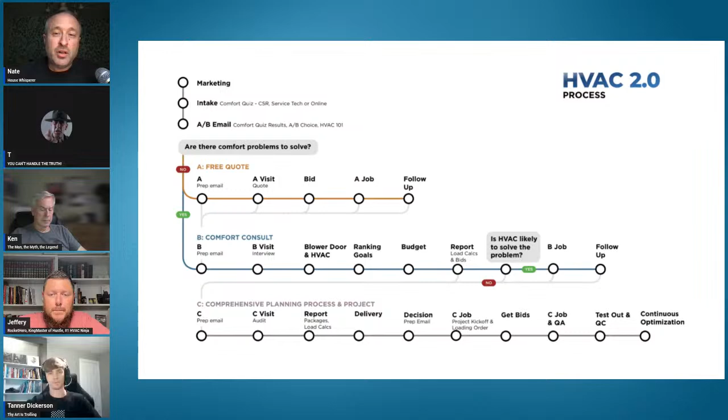And we're actually going to dive into a piece of the detailed process. So this is pretty intense. This is the entire 2.0 process. The C path down here, this is the one that's going to be used maybe 1% or 0.1% of the time. So when people come in, they find you through marketing or from a service technician, whatever that looks like. They go through the intake and they go through the comfort quiz.

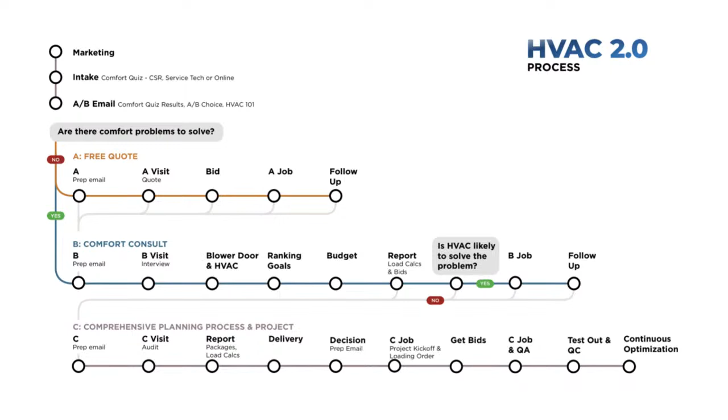Then they get the results of the comfort quiz sent to them, and they can decide, are they going to do a free quote or a comfort consult? So that's what we're going to be running through. So we're going to take a much deeper look at this for what it looks like in the software right now and how that might affect your business and make your life easier and hopefully sell you a bunch more. I'm actually going to skip this slide. We've talked about it. That's the less detailed version.

So we have talked in many of the episodes in the past about the 6 functions of HVAC. This is fundamentally how we, at least, sell better equipment very consistently. Because there's 6 different things that every HVAC system should be able to do. Every car that has air conditioning, which is basically every car since like 1992, can do 5 of these 6 functions. Most houses can't do any. And so they are load matching, dehumidification, mixing, filtration, fresh air, and humidification.

And what's nice here is with these smiley faces, which this is what you show them at the end of the quote, the basic system doesn't look so good. So yeah, you don't even have to show them SEER or efficiency. Nope. Or things that don't matter to them. Show them this instead. Yeah, no one cares. This won't confuse them. Yeah.

And like we've shot at the IRA heat pump program because it leads to systems with bad dehumidification, and then you don't get fresh air with those generally either. And so this will help lean people away from that sort of thing. And then you can put whatever systems you want in, and you can change all of these names. Like all of this is editable. But we're going to work up to how you show this sort of thing.

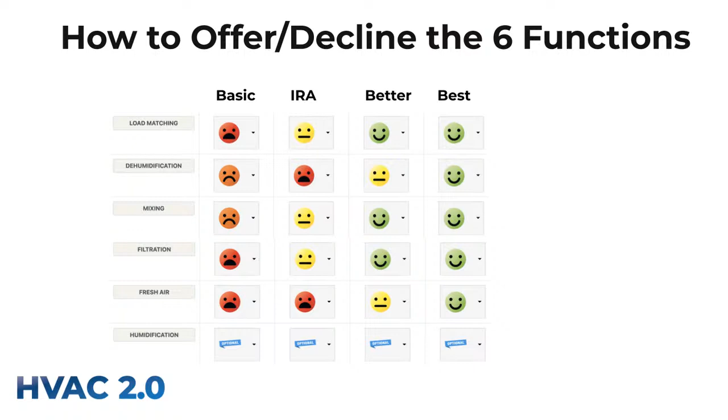And in 2 weeks, I'll walk you through all the videos that we have done for these. So it's not that they couldn't use another update, but the content is there for very quick education in 10 minutes or less for clients. So if they're about to spend $10, $20, $30,000, isn't it worth 10 minutes of your time to get some basic education so that you can make a better decision? So we'll show what those videos are here soon.

And also to kind of add on to that, the videos being the educational material, this is kind of to take what they've learned and then put it into terms where it's bite-sized chunks where they can understand what the differences are, because everybody that's done this, they've been in the situation where someone's needing a new unit and they're asking questions about, okay, well, what can I get? And then you start trying to explain the different options that you have, and then you see them go, oh, none of this makes any sense, and you realize that, oh, I'm wasting my time.

Well, the whole concept of these smiley faces and such really was just how do you take the things that are actually important, the things that they need to understand, and then use that to then differentiate the different options. So then when you're showing them options, they go, oh, I understand now why this basic unit costs $10,000 and this high-end unit costs $30,000. Yeah. Yeah, it's a value building exercise.

I mean, if you're selling on SEER, what's the difference? This one's 15, this one's 17. It'll save you $25 a year. You're not going to sell the higher SEER stuff, or not at a significant rate. But I mean, everyone here sells 80 to 90% high end. Communicating, whether that be 5-stage or fully modulating. I have sold one 2-stage ever. And that was for a Habitat for Humanity project where we just flat out didn't have the budget. So this flips how your sales work. And so if you can double your tickets with this, that's pretty cool.

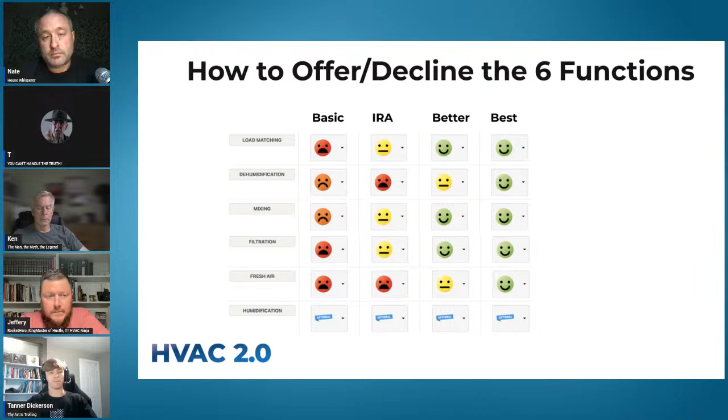Well, one of the things that we thought originally when we did the free quote is that it'd just be an easier way of doing the typical free quote that people are used to doing. And it hasn't been out for very long that these guys have been testing it, but feedback from Reedy and Ronnie is that they're making much, much bigger sales, and it's really easy to sell the better equipment using the free quote process. So that's been interesting. It's just anecdotal right now. We really want to get a year in and make sure that that's sort of what everybody experiences. But in the short term, Reedy sold a $32,000 job off a free quote 2 weeks ago.

Yeah. Or rather, the way I would say it is that it's not that they're selling better equipment; it's that people are buying better equipment. Correct. Yeah, educated. Thank you. Yeah. This is a pull process, not a push. No one should ever feel like they were pushed into something here. So you can have this, or this. Here's your prices and your ramifications. What works best for you?

And it's amazing. Tanner, it's funny. You mentioned it last week, you see all this stuff. So how do you differentiate yourself?

And come on, most people are not differentiated. It's our trucks are pink and our trucks are blue. It's these really small little things. This differentiates you, and it also differentiates the equipment in a way that your clients can understand, which is what we're trying to do. And most importantly, because we started at the far end with doing the really difficult home performance projects, this doesn't close any doors as you get there.

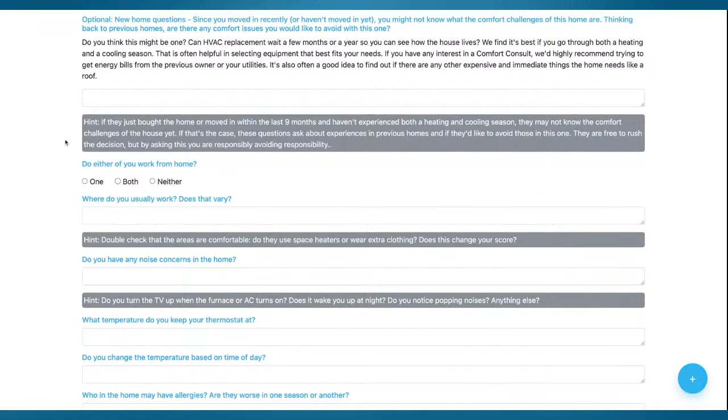Some people have just moved in, so this is an important piece too. If they have just moved in, been there for a couple of weeks or maybe a couple of months, until you've experienced both a heating season and a cooling season in a home, we really don't recommend making changes because people tend to downplay what's going to bother them and then choose the wrong system. It's better to wait if the system has life. So you ask them some questions, or if they want to move now, hey, have you had any issues with previous homes? Stuff like that. Do either of you work from home? Because this is going to be driving a lot of comfort stuff now.

And then we get into a bunch of responsibly avoiding responsibility questions. These are all pulled from the Comfort Consult questions, but this is way fewer than there are over there. So do you have any noise issues? Where do you keep the temperature at? Does anybody have allergies? Does anybody have dry skin, pest issues? Have you noticed mold or mildew? So these are hyper shortened, but if you sniff much here, this may shift it towards a Comfort Consult. Although like we talked about last week and how to price it, you price the Comfort Consult high if you don't want to do them.

Then this is kind of a fun thing. Do you know what size equipment you have? And actually, if they say yes, the odds are pretty good they've gotten quotes before. And we're going to add another question. Jeff, what was the question about? I think it was later in the pricing, right? Like, do you have any idea what this might cost? Yeah, I mean, all these questions, again, are just trying to get a little bit more information, how to help guide them and kind of figure out where they're at as a buyer. Yep. So this question, another question coming up here in a bit, just all lead to that.

And well, the one that I was thinking of in particular, if they have an idea what the stuff is going to cost already, it means they've had other bids. So that lets you know you're not the first one through the door, which is usually good, frankly.

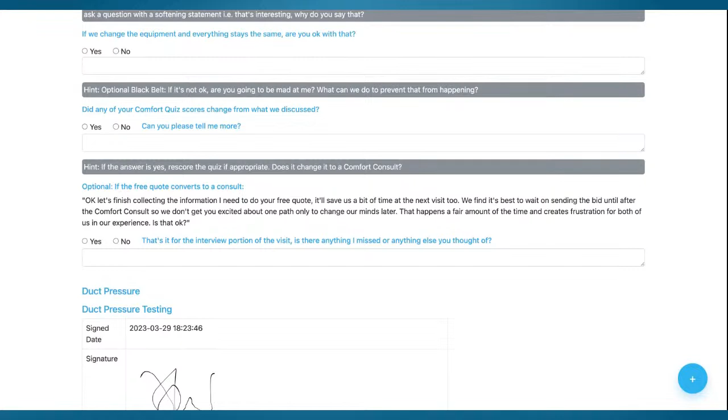And Jeff, I love your question here. Imagine you had a magic wand and could change anything in your home. What would that look or feel like? I love that. And then this is Johnny: if we change the equipment and everything stays the same, are you okay with that? And then you ask them again, did any of your comfort quiz scores change from what we discussed? So those are the questions. Those shouldn't take particularly long, but you just responsibly avoided responsibility like a badass. If they say no to all these things and they bring it up later, like, ma'am, I documented what you told me and you said it wasn't a problem. It is what it is.

Actually, Nate, that might be somewhere along the line, probably at the beginning. We want to let them know we're gathering information for both of us. I'll be giving you a copy of this so that you'll have a record of what we talked about. We don't want people thinking, oh, they're just trying to learn more about me so they can push my buttons and get the most money. That's a really good improvement that we should put in here, Ken. Yeah, because this is not meant to be coercive. It's just we want to ask all these questions.

I mean, if you go to the doctor and he doesn't ask you enough questions and there's multiple things wrong with you, it's kind of his fault if he misdiagnoses you. Yes. So we don't want that to be our fault for misdiagnosis because we didn't ask some questions. So we wanted to pull some of them over from the comfort consult, but there's 3 or 4 times as many over there. And this is a free quote. We're not getting paid. We still want to move on, but we also want to check the boxes.

Now, another order thing that's not correct here is duct pressure. There's going to be a blurb about it, or a couple of questions about it, and then the 70-second video, which is actually 90 seconds, that Ted likes to talk about, and you have them sign off whether they accept or deny that. And this is where we recommend offering duct pressure, which is external static pressure testing, for something pretty cheap, like 25 or 50 bucks, so that if they say no and they sign off on it and the system dies later, it's like, look, you were the one who didn't want to spend 25 bucks. Come on. Because this will likely lead you into a sizing thing if they have a high static, which might lead you to a comfort consult or just more conversation. But the odds of getting a job because you're doing this are much higher.

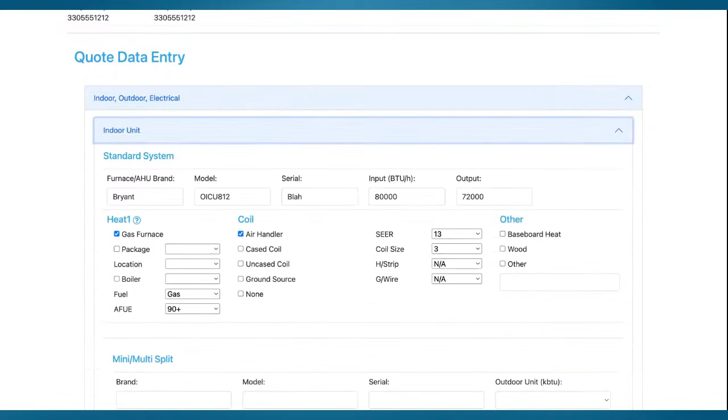So this is going to also drop to only 3 sections. So we're going to have the indoor, outdoor, and electrical section. We're going to have the static pressure worksheet and equipment measurements, and then we're going to have equipment choices. That's all that's going to be in here. So these other ones are going to disappear shortly. Well, also the indoor, outdoor, electrical, we're also going to have a mini split ductless option as well. Thank you. Yes, because that is currently in the indoor here. So this is meant to be quick and easy, but still complete data entry.

Big thanks to Ken on this, and also Jeff. But man, Ken, thank you for your help on all this. That was great.

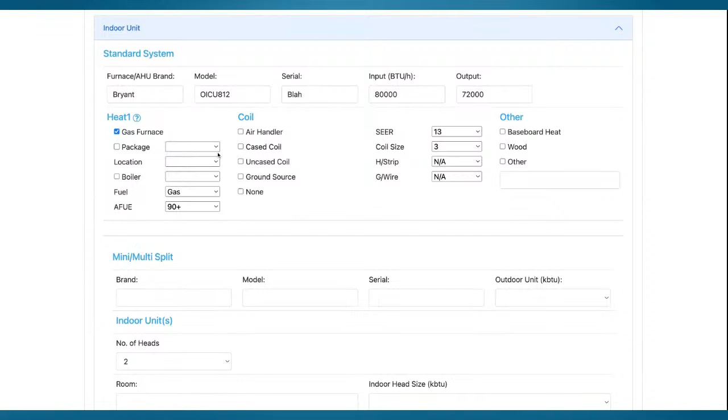And so you can put in what they have now. Brands, model number, serial number, input and output if it's a furnace. You can check whatever it is. We did have this set, so there were rules on what you could do, and then we kept breaking it. So now you can select whatever you want. So please have a brain as you check these boxes. You're not going to have more than one. Like you're going to have a gas furnace and a cased or uncased coil.

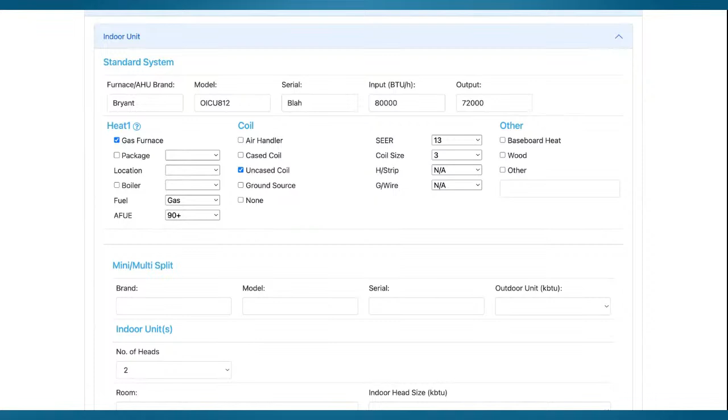Is that, no? That should also show the coil stuff. Need to figure out what's going on there. But this pulls a lot of your key stuff here. In fact, there's generally some stuff disappeared in the update since I looked at this a couple days ago. So, all right, we're going to have to go back and put those back in. There's supposed to be a bunch of stuff here also about what the venting is, what the gas line is, things like that.

Yeah. Gone. Is it down further? Yeah, no. Nope. Oh, God. Down. Yeah, there's supposed to be 3 or 4 more sections here. And then you get into the mini and multi-split, which will end up being a separate workflow.

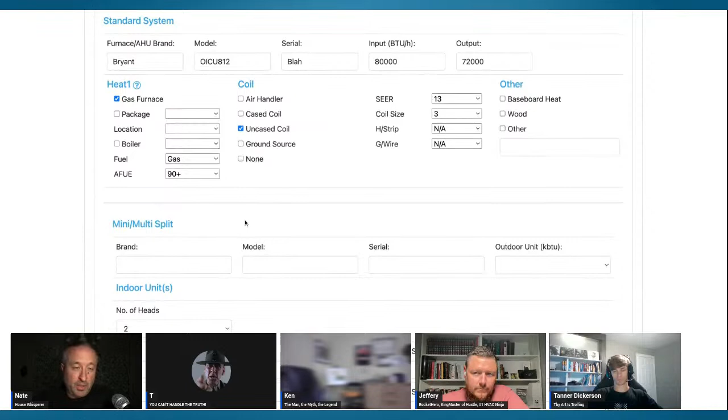3 updates go forward and 1 update goes backwards. This is when I keep saying, yeah, like 2 weeks, this is the stuff that keeps driving us nuts. Like something gets pulled out by accident and we have to catch it. So in any case, there's a bunch more stuff that should be here that's not at the moment. And it was there last week. So we'll get that back in.

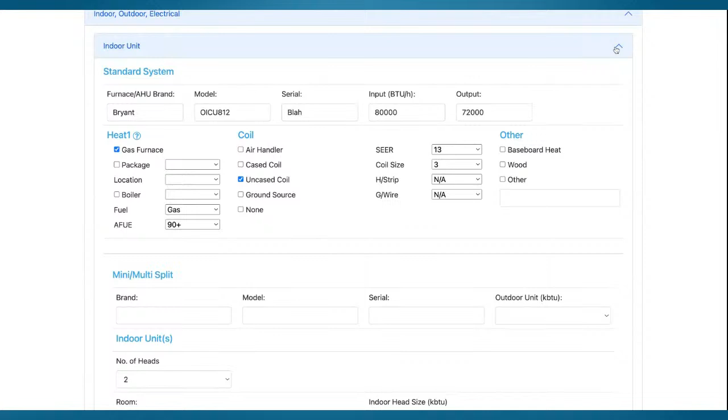And then outdoor unit is pretty simple. It's just your brand, model, size. Is it an air conditioner or a heat pump? If it happens to be a window unit for some reason that you're putting in here, you can do that. And then what's the output of the system? So that's super simple.

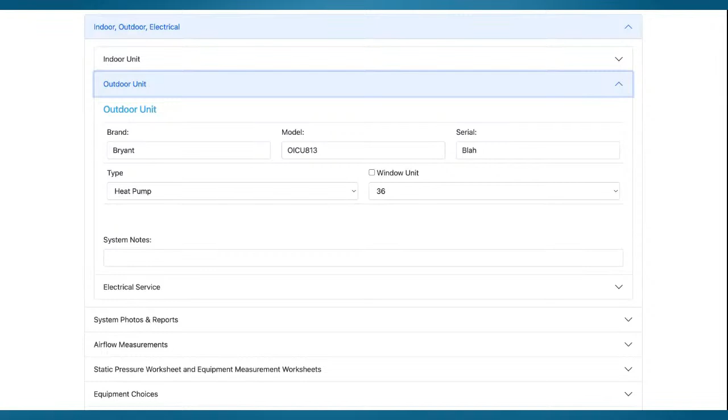And we are missing the refrigerant line measurements here too. Yeah, that's one that they said in programming that they were having some issues with in the measurement section. Okay. So we know they're working on it. Yep. So hopefully Saturday, all this stuff will be back along with the other little tweaks that we were working on.

And electrical service, I'm happy to have this for either the electrification side or just in general. I think these were questions I always got when I was speccing out equipment. So what brand is the box? So they know what size breakers to buy, and what brand rather. Is it a fuse box or a breaker box? I haven't seen a fuse box in a long time, but in California, they have a bunch.

What size main breaker is it? How many extra slots are there? What's the outdoor unit size for the breaker? Does it have a sub panel or not? And is the equipment in the sub panel, which would be weird, but it could happen. But this collects enough information that your install manager shouldn't have too hard of a time figuring out what to buy.

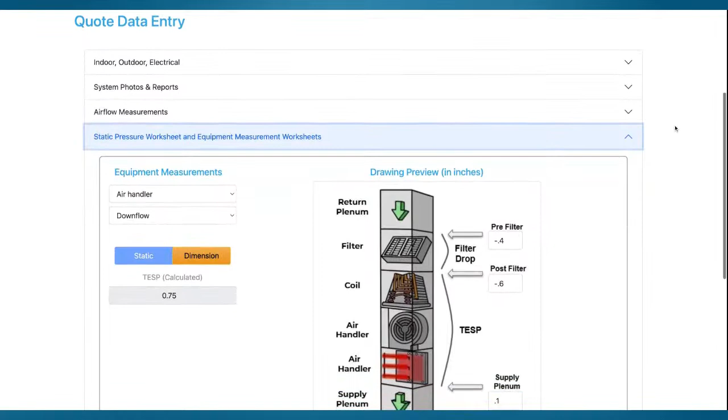And then this is where there's some pretty fun stuff. So the static pressure worksheet and equipment measurement. So you can select whatever you want. Let's do a furnace and coil. All right, somebody shout out which one to do. Upflow. Great.

So here's an upflow system, and you can do either left or right orientation. And note for static pressure, it tells you where to drill the holes. And then you can put your numbers in, and then it will calculate your external static pressure. Okay, fingers crossed. Well, it is working right now because I made sure to put a negative here. Oh, okay.

Yeah, so it's doing something weird there. Oh, it is still seeing the difference between them. But it's supposed to calculate the difference between these. This formula needs a little bit more work. I can't remember what the mathematical symbol for it is, but it's the two bars. It takes away whatever the plus or the minus is on it. So this is in here.

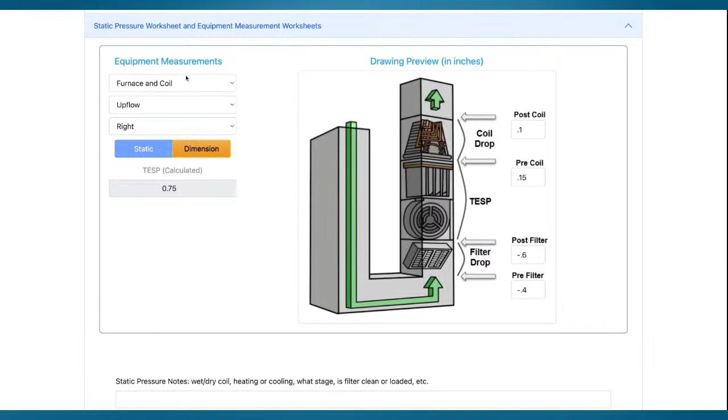And again, you can select any different kind of system you want. So let's do an air handler that's upflow left. There you go. Or this. So it makes it look like the system so that your newbies actually know what they're doing. And then it lets you take the dimensions.

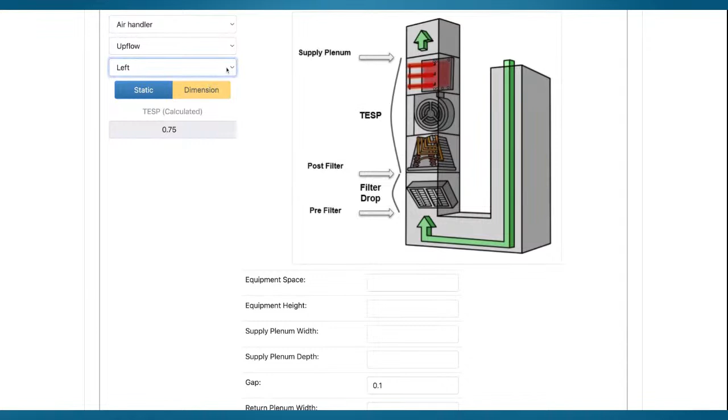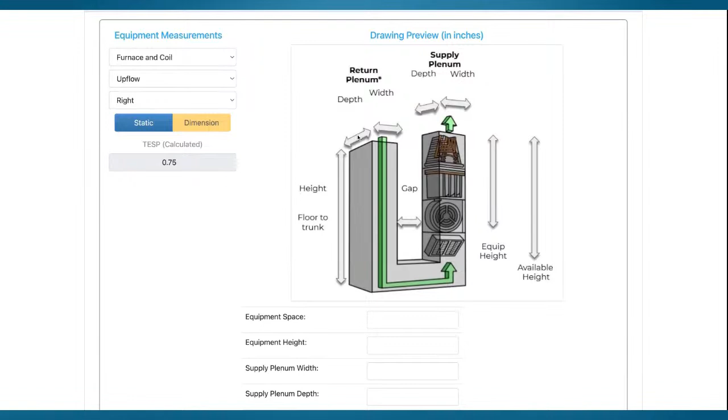Let's see, this has been one of our other challenges here recently. Yeah, it's not doing this right. It should be putting these dimensions right on the measurement of the system. You get to see the fun stuff of doing all this. Click on dimensions again. Here we go. Well, it's actually showing the drawing here. Yep, and then you input down below. It doesn't pop on the picture right now. Yep. So it will. So like the gap here, it should have a box here.

This is challenging because we're designing it for a bunch of different screen sizes. Shoot, there's a word for it in web design. My mind's blanking. Anyway, this is made to work on a phone, tablet, or a laptop, but we're optimizing for tablets. If you type it in there, will it show up? No, it's not going to. This is one of the things that's been a challenge.

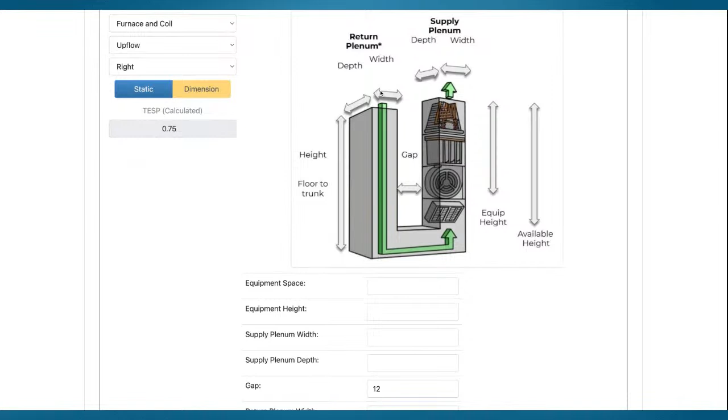But if you have all of these dimensions in a system, you're going to have a much better idea of what size ductwork to order. And hopefully, again, this is where the install manager will be thankful, because they won't have to go out there and pull the measurements themselves. Yeah, these numbers and pictures, they'll be happy. Yep. You should be able to order stuff and be okay.

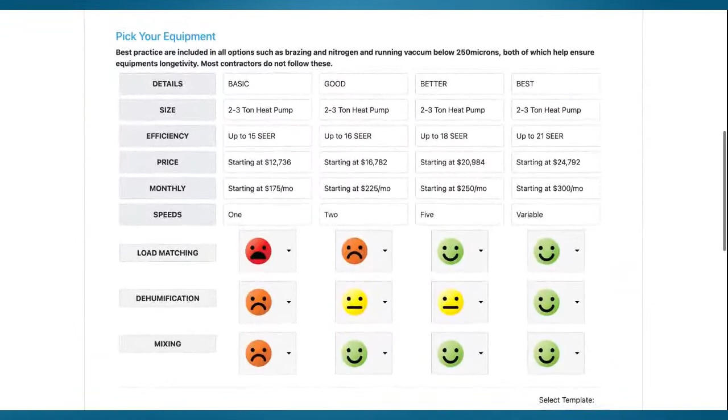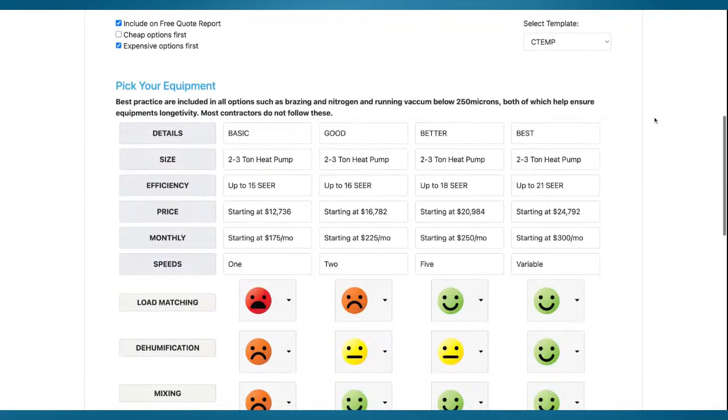And then equipment choices. Yay, the smiley faces are working again. You can either put the equipment choices on the free quote report or not. You can run cheap options first or expensive options first on the report, so that you can show people through these. And these are pulling from a template. In fact, you can see right here, let's run a heat pump template instead. Or like I did an IRA template. And I must have played with that, it should have a frowny face.

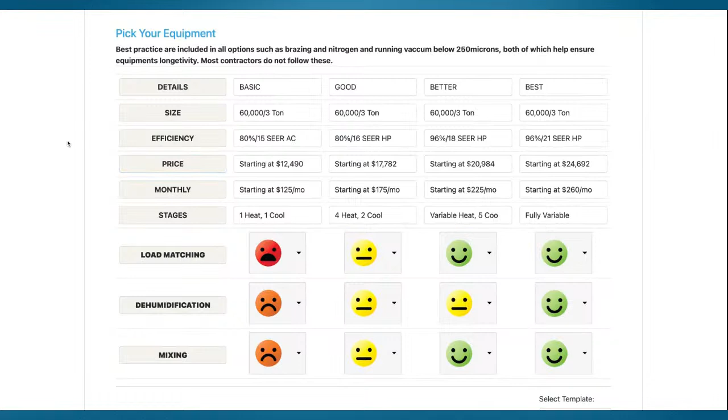Package heat pumps, if you're looking at that sort of thing. And they kind of suck, because basically if you want an inverter, there's a Bosch. That's your only option. Or you can run hybrids. So this pulls this up, and then you can type in whatever you want. And that changes now. That's brand new. I asked for those to change. And then we need to be able to hide or show each one of these.

But then this will let you put in whatever equipment you want to use. You can name what the systems are called, because you probably have different verbiage in your company. And you can change any of these to whatever you want. And you can make your own template as well, because most people only have a handful of systems that they normally sell. So you can set it up for that, because again, this is a free quote.

So there you go. And when you're done with all of that, you can click this Generate Quote Measurements PDF, and it creates a PDF of all this data entry. Look, you can see here, this has venting on it, and filter type and gas line type and location. These are all the things that weren't showing when we were looking at it. What kind of chimney does it have?

What are you talking about? Your screen's not showing it. Oh, shoot. Oh, hang on. They jumped to another page, yeah. I did. My bad. Thank you for the reminder.

Oop. I forgot about that. I changed tabs. How come you guys didn't come with me? What's wrong with you people? See it now? Mm-hmm. Yep.

Okay. So this is the form that the install manager would get. And now you can see there's the location, so you can check the box as to where it is. What kind of gas line does it have? What kind of filter does it have now? Is it a filter cabinet, filter grille, electronic, whatever? There's your size. And you can select more than one as well, and then put in what the other filter sizes are too. And here's your venting, whether it's metal or PVC.

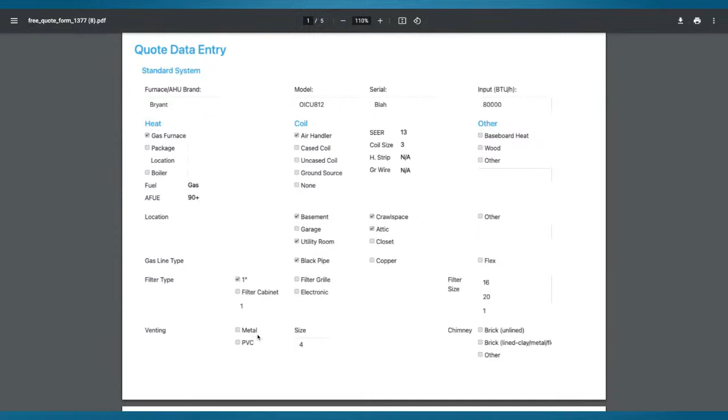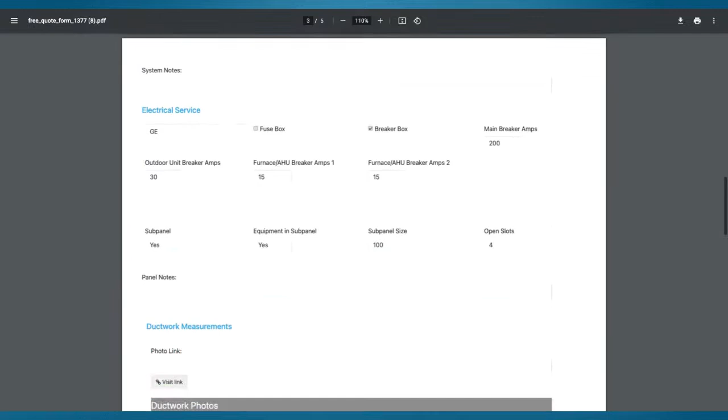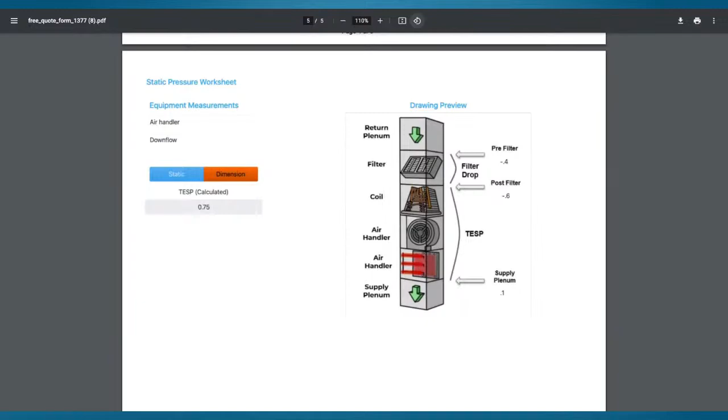Well, plus, every time you send a person to the house, that's interrupting the homeowner. And so you really need to be conscious of how many times you want to send people to the house, particularly if it's not for any significant purpose. Exactly.

This is not the best way. Let's see if this button works. Nope. Uh-oh, what was that going to show us? Go back to free quote questionnaire. So that's another thing that's coming. So after you go look at the equipment and you fill this out, then you're supposed to click here. You go back to the free quote questionnaire. You ask the client a couple of questions, like, are you planning to make a decision today? Or can I have some time later to complete this and send it to you? Yep, exactly. But it doesn't take very long anyway.

No, but that's a test. You're asking that question more to test, you know, do I need to give you a quote right now? Because do you want to buy right now? Is what that question is. Yep. Only it's a much softer way of asking it. Yes. All of this is, again, meant to be no coercion. So that's one way to do that.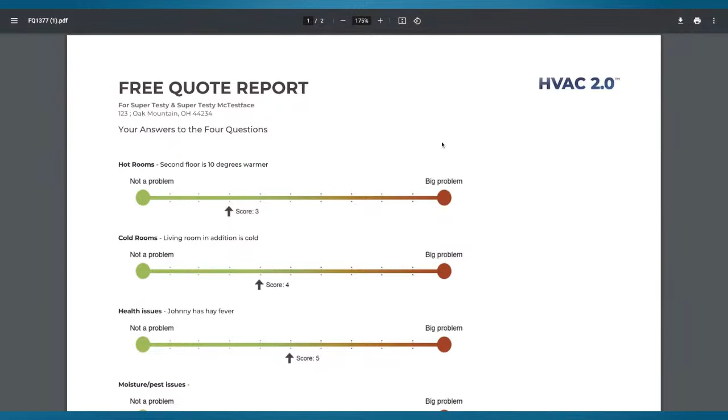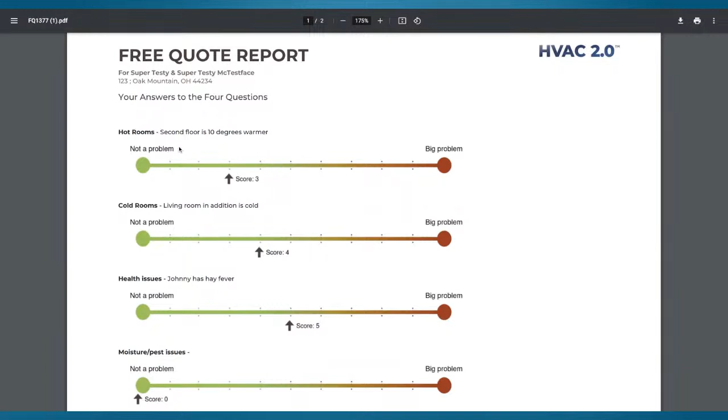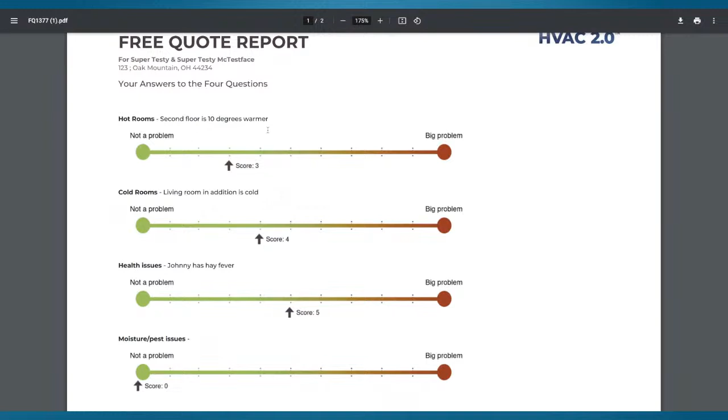And then there's also the free quote report, which is right here. And I need to go change which thing I'm showing. The wonders of doing these live. So this has a few more iterations as well to do, but it's got some key things in it for now. So here's their answers to the 4 questions. So they're going to get this as a report, printed out in hard copy that they can look at. And note that it has what their comments were for each of those 4 questions. And then it shows what the score is and what's recommended.

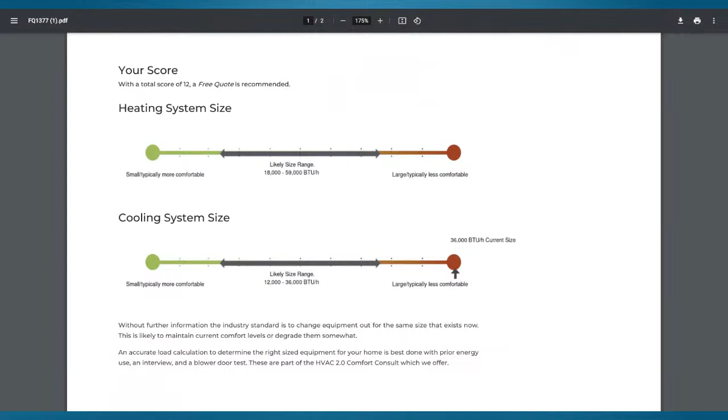Jeff, are you going to say something? No, I was just going to ask the group, why do you think that we have those comments along with those scores on the 4 questions on that report? To remind them? To remind them of the pain. Yeah. And then also the big thing that I see is the warranty portion again. So I'll be the guy that talks about the warranty, right? When they call back after they do a like for like or whatever they decide to do, this actually allows you to pull that report back up and go, it's been a problem even with your old system. So it's not like this is a new issue or concern.

So one of the things that we're getting more and more feedback on, mostly from Jeff from different experiences he's had, is that this concern of warranty calls after installs is being pretty broadly felt throughout the industry. Yeah. And so having a process that's going to help avoid taking big bites out of the warranty reserve budget is going to be hard to quantify at first, but I think once people start using these processes, they're going to be like, holy cow, our warranty reserve is falling from 4% to 1.25% or something like that. It's going to be big savings. Yeah, particularly as we're moving to more complicated equipment, in particular ECMs and X13s that don't deal with static pressure like PSCs did.

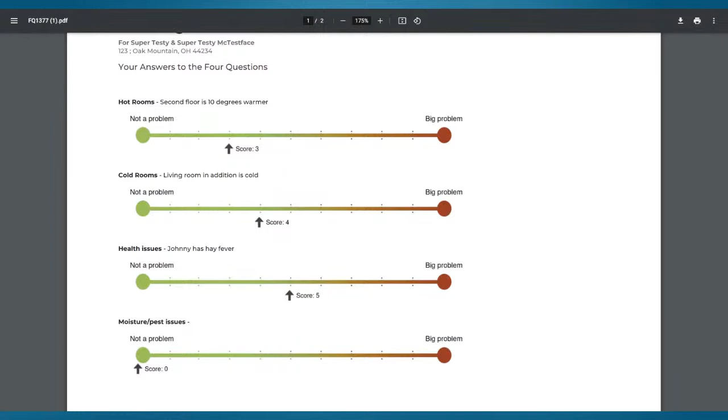This is going to drive everybody bonkers. Well, and I'm seeing a lot more complaints about humidity too. So, you're buying equipment that's going to do a worse job in removing humidity than the equipment you had before. So the house is going to feel different unless you're really careful. And it's going to feel different in a bad way. Thank you, efficiency standards. Yeah.

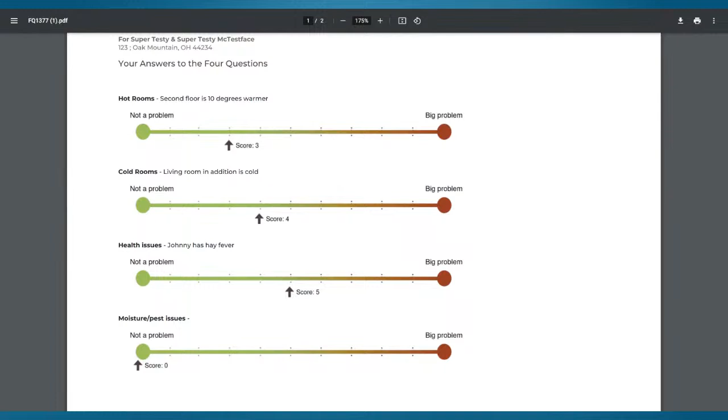Well, we'll just get rid of the dehumidification. We don't need that. Just throw that out. Boy, oops. Change of state from vapor to a liquid is just so expensive. Let's see if we can avoid doing that. We'll just not do that. We'll make people sick. Sick building syndrome for the win.

So here's also, if you want to talk about likely load range, right? It's the beginning of it. Yeah. So this is what's in there right now, where you can enter in what you think the bottom and top for a house might be. But what we found is so many people are just not used to doing loads at all that we wanted to automate it. And we came up with the idea of likely load range. Let's do some really basic back-end calculations.

And since we're not doing an actual calculation, if you think of a bell curve, we're trying to get 2 standard deviations out, which covers 95% of systems out there. So you could, in theory, be above or below either of those numbers, but it's not going to be that many houses that are. And it helps describe to homeowners that, hey, we really don't know right now what the best size is for your house.

Or like Reedy's example of, we got 3 loads at 2, 3, and 5 tons. What are you supposed to do with that? We aren't collecting all of the information we need to do an accurate load. There are a lot of 2,000 square foot houses out there that have 120,000 BTU furnaces. And we're usually somewhere between 2 and 3 tons for heating. Yeah. On those houses, maybe 4 for climate zone 5. Well, for climate zone 5 or 6.

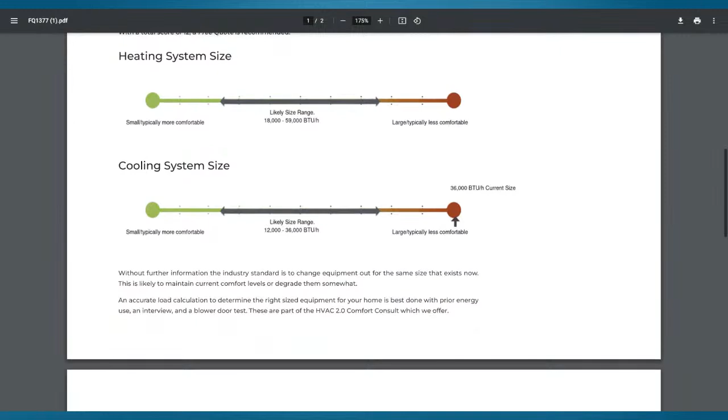And since you've done a good job of educating them as to what these decisions mean, and that's really a big part of our philosophy, is you can't ask a homeowner to take responsibility for something that they don't understand. Exactly. So your responsibility is to educate the homeowner so that they can take responsibility for their decision. Yep. And it's your responsibility in particular to do it in a way that you are satisfied that you did it well enough, and preferably that you documented multiple times that you offered them that education and they still made the bad choice. Well, that's your dumb decision.

Jeff, do you want to tell the story of that warranty call, by the way? It was the one where they were offered the free quote in the comfort consult. They took the free quote and then they had high static. Yeah. Just real quick on that was, we asked the comfort quiz. We gave them the option. They chose to do the free quote, as you mentioned. And then from there, they did a like for like replacement. It's zoned. So afterwards, multiple service visits, I get involved, get out there and say, hey, we can go about this a couple different ways. We can do the comfort consult now, or we can try to match your ductwork to the equipment size and just guess and hope that it works with no guarantee of comfort or anything.

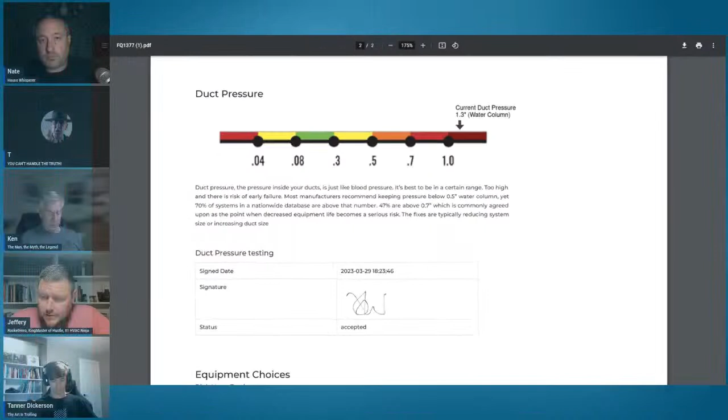And the homeowner chose the quick path, which was just let's undo the zoning, at least so the system didn't overheat. So solved the problem, didn't it? Well, it solved the system from overheating, but the comfort issue they had between the two levels was still there. Still oversized, shutting off. Yeah, but again, as you said at the beginning, not my money, not my problem. Yeah, not my circus. And did the company have to pay any warranty costs? No, the client actually paid to undo the zoning.

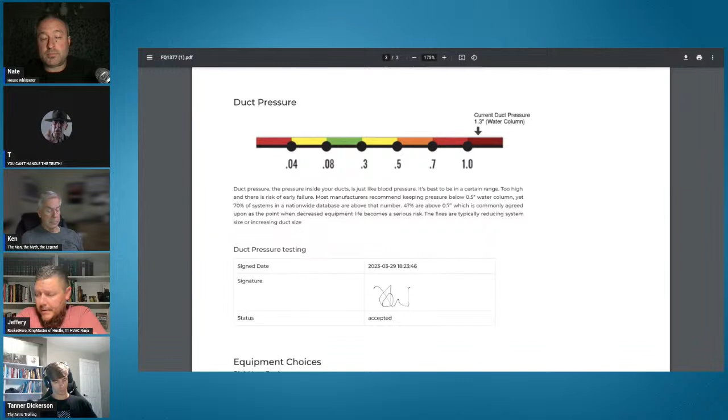There you go. And normally that would have bit you, right? Yeah. Typically, if we didn't have that documentation prior, we probably would have gone in there, done that testing. We would have done a warranty comfort consult, basically, and ripped out the system and replaced it with a proper size, probably did some duct mods and zoning, all for free, which would have eaten that warranty reserve. Yeah, that would be a $30,000 or $40,000 project, probably.

Ran into my fair share of those, yes. There you go. So would you like a $30,000 or $40,000 retail warranty job, or you charge them a couple $100 to disconnect zoning?

So also, when you're talking about this duct pressure illustration here, Jeff, do you want to talk a little bit about one of the tools that you use for duct pressure and why you don't recommend it? There's a couple tools I use, but the one in particular you're talking about is one that we were all initially excited for, I will say, right? Mm-hmm. So just speaking the truth that, hey, we thought this could be an add-on that we could have in the sales world where we could help.

Well, in fact, as Tanner knows, and made some beautiful charts for as well, it actually says the high duct pressure is okay. It's in an acceptable range, but especially on a PSC motor, if you check that and it says it's in an acceptable range, then what kind of liability do you have when you go to replace it with an EC motor? Or what is the acceptable range, by the way, Jeff? Oh, it runs all the way up to 1.

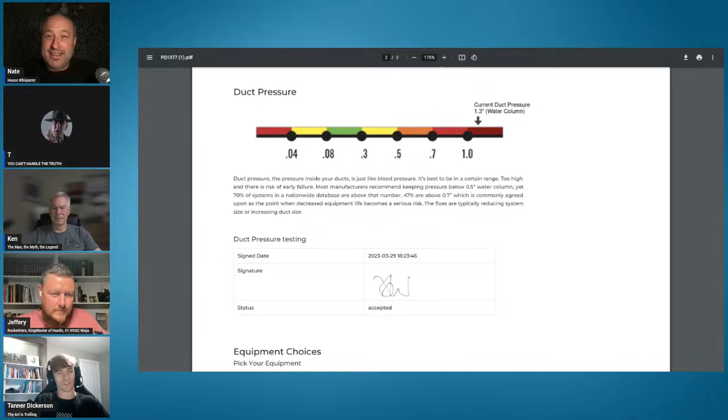Nothing's better than promising energy savings just to completely eat up all those savings in your fan motor because the duct pressure's so out of range. Yeah. That's exactly it. And in the end here, this isn't on yet. This is the smiley faces. But hopefully this makes sense.

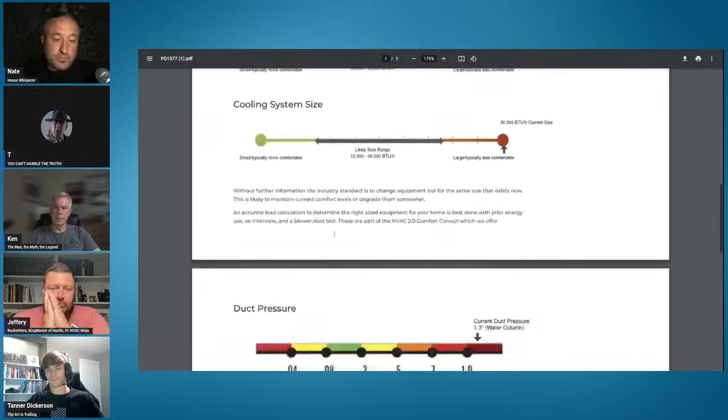So you show them what their answers are to the 4 questions of the comfort quiz, what their likely load range is, what the duct pressure is, and whether they signed off on testing or not. So in this case, it was accepted, but if they decline it, there's just going to be a question mark on this. Who knows? And we can put a note in here. You're taking the risk as the client here. And then the smiley faces.

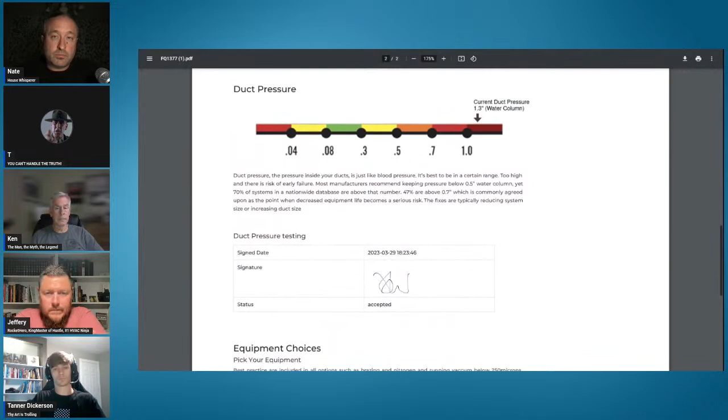Well, and as the person giving the specification, you're the guy writing the check. You ultimately get to determine what the specification is. And I'm the guy just bidding to that specification because this is a free quote. Exactly. And you have to show them that. They have to actually understand what this is. I mean, it's kind of difficult to take a moral stance of trying to make claims while at the same time trying to portray something that is bad as good.

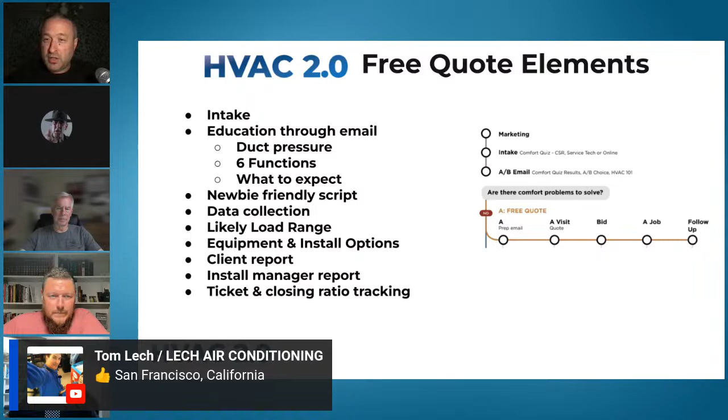And heating cooling services, I'd love to see this process and measure quick commissioning after the install. That is really a key thing. You can show that it's done well. So I haven't dug into the ACCA 310 that just came out, but that looks pretty interesting where you actually show that it's there. Because yeah, if you actually want to reduce consumption, you can jam in a high SEER piece of equipment and have it run an inch of static, and you ain't saving squat.

So ACCA 310, I've looked a little bit at it, Nate, right? Okay. It's saying that you're going to do all this testing, you're going to do all this design up front, and then you're going to go through proper install practices to proper commissioning. But it doesn't state anything about that it should just be free or that you should charge for it. So it doesn't differentiate that. Again, it's just a practice that we would love to do, but who's doing all that legwork for free? Which leads us back to this. You got to offer. Yep.

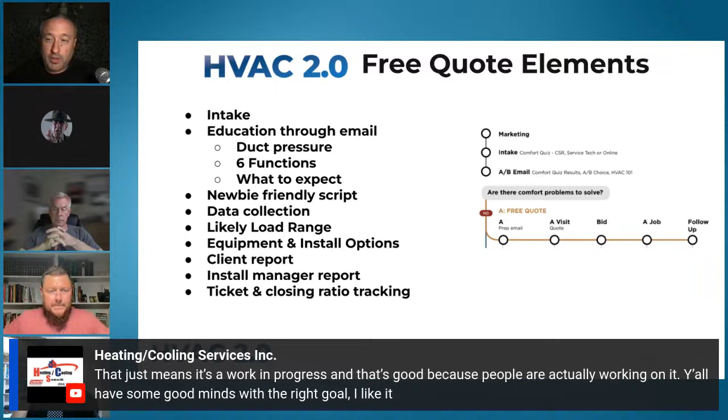Let's see here. And thank you. Yeah, it's a work in progress. You put that in at 9:00 when I was probably showing something that isn't working right now. That's why I haven't shown it until now, because there's been all of these freaking bugs. And then here there were a couple I hadn't even found. We just found them tonight live. Oops. There's an update on Saturday. I hadn't combed through it all yet.

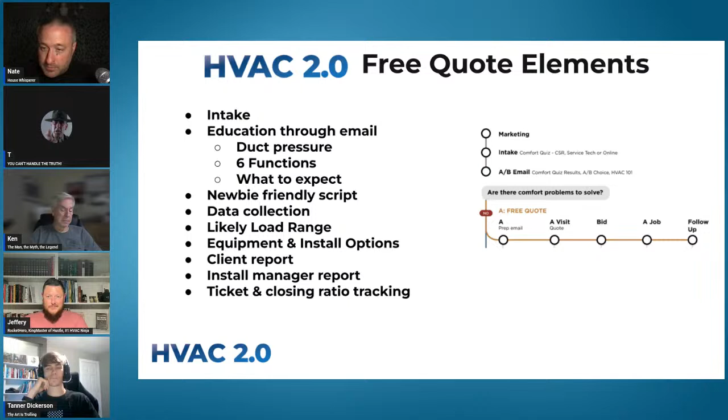What's this? Pump or package unit. Oh yeah, here you go. Yeah. Well, heat pump getting below 0.5, not that hard. Pretty much all the systems we've done are heat pumps. They're at least a hybrid.

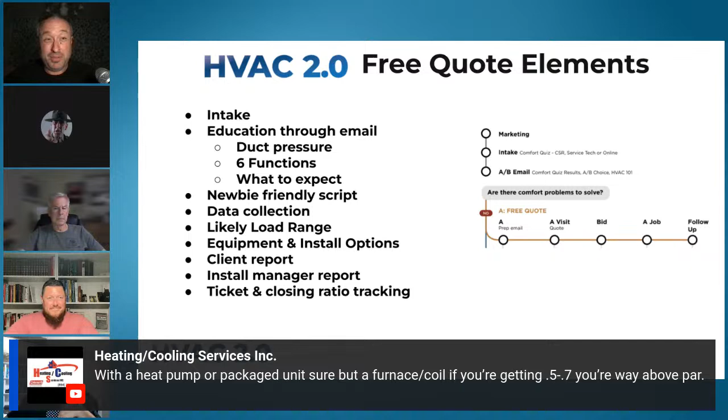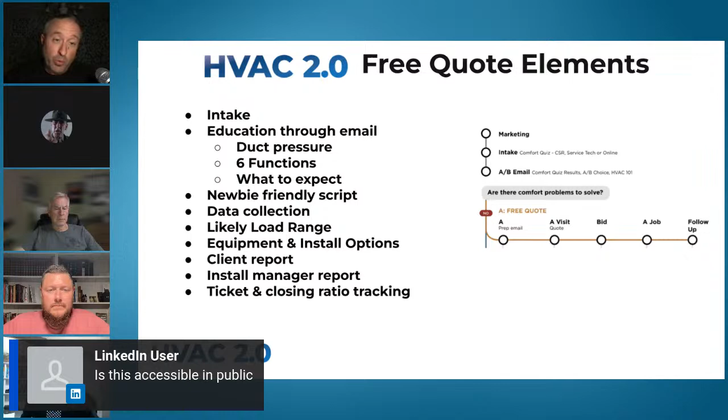And is this accessible in public? Yes. You can sign up now if you want. Fair warning, it's still buggy for a short while longer. But it's an app. Like there's an app for that, app.hvac20.com. You can go sign up for an account, and they are free for 3 months. In fact, let's look at pricing while we're on that subject. This is pretty cheap for the moment. So the basic account is free for 90 days and then $6 a month. You can put as much data in as you want for free.

And I'm getting feedback. Is that me or one of you all? Turn my volume down.

So the data entry is free. You have to pay by the report. They're $10 for the free quote reports, and that gets you both the client-facing one and then also the install manager one. $25 for comfort consult reports, but keep in mind you only get access for 90 days. So you want to save that if nothing else, and you don't get advanced support. Subscriber, there's a $500 setup charge, then $200 a month, and then everything's unlimited, and you get access to the higher end support group. And then through all of this, remote and on-site help and training are available.

So again, I should have put it on here. I'm dumb for not doing it. app.hvac20.com. We anticipate people to sign up for the free account. And it doesn't require a credit card or anything. What happens is after 3 months, if you try to get into the account, it's over. You have to pay the $6. And that's when you put your credit card in. Exactly. You get to use it truly free for 3 months, so you can try it out. And then you don't get to use a report unless you pay for the report. So you'll get to use the software for free all the way to the report, and then it's $10 for each report that you decide you want to print. Yep, per client.